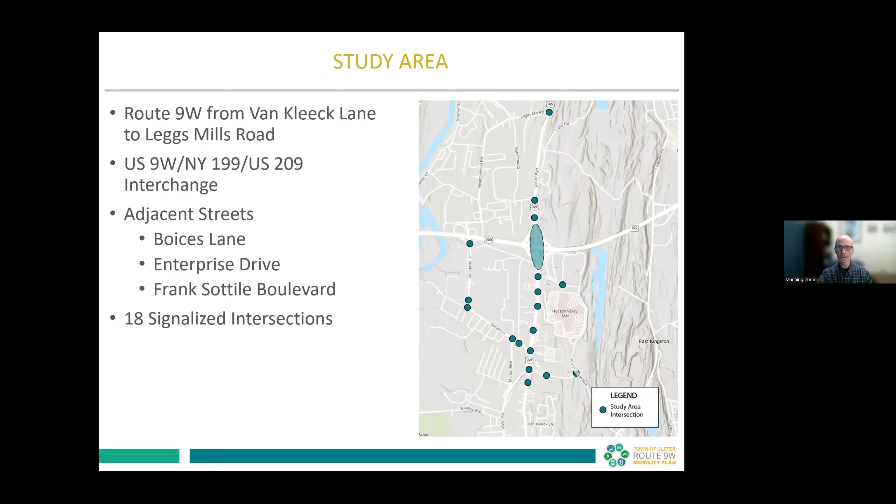The purpose we've talked about in the opening remarks is to look at safety and connectivity for all users in this important corridor, and to consider future travel needs, as Brian mentioned, 20 years into the future. We've been at this for a couple of years already, and we had a meeting very similar to this last summer where we got your input, and now we're back to share our recommendations with you and get your feedback on that as well. What we heard from you last summer when we asked, what are your priorities for the Route 9W area? Improved safety came out as the most important element, followed by improved bicycle and pedestrian mobility and accommodations, and connectivity or access management. You can see some of the other things that weren't quite as highly rated

from public input. We also asked what were your concerns with Route 9W, and again, pedestrian connectivity concerns rose to the top, aggressive driving, and the needs of bicyclists as the top three. In the middle there, you can see congestion. So although there's a perception that there is a fair amount of congestion out here, it's not the highest concern of the people that use Route 9W in the surrounding area.

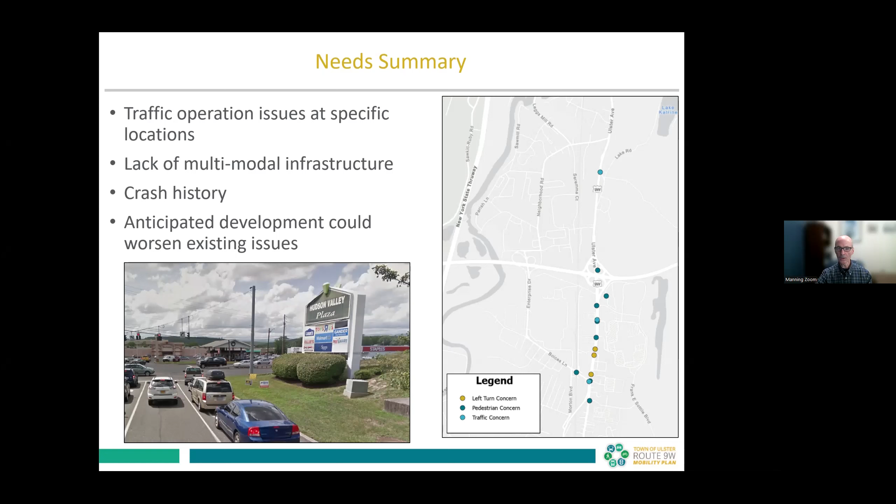So coming out of the existing conditions work, we identified a number of needs. None of this should be a surprise to any of you, but traffic operations at specific locations, the lack of multimodal infrastructure, meaning safe pedestrian crossings and lack of bicycle accommodations. There are crashes in certain areas, particularly in the south end of the corridor near Ulster Avenue, and the anticipated worsening of conditions as development at I-Park 87 and other redevelopment happens in the area.

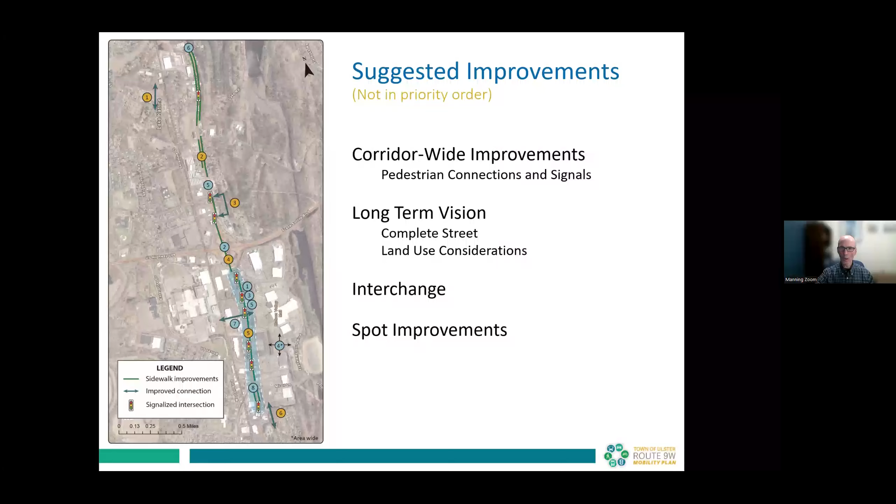So as a result of all of that work, we did develop the draft recommendations that we'll share with you now. And basically, we've categorized it with these 4 categories. Corridor-wide improvements. We think there's a real opportunity here to do some of the obvious things to improve pedestrian accommodations. And then a long-term vision that we'll walk you through. Some of that work could be more short or medium term, as Brian had mentioned in his opening remarks. So we'll walk you through these draft recommendations. So this is really the meat of it.

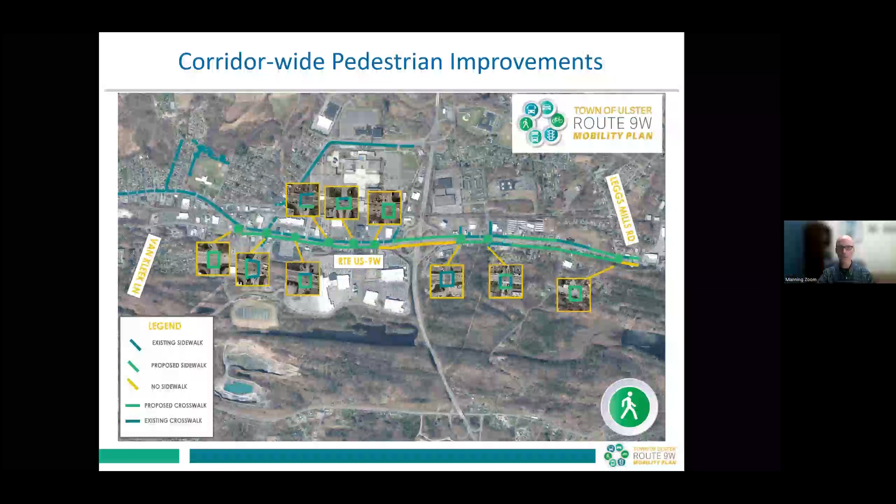At the intersections themselves, the study recommends completing the box or adding safe crossings at all of the signalized intersections in the corridor, where the majority of the signals do not have simple pedestrian crossings today. So really a straightforward priority is to get some pedestrian improvements in place in this corridor.

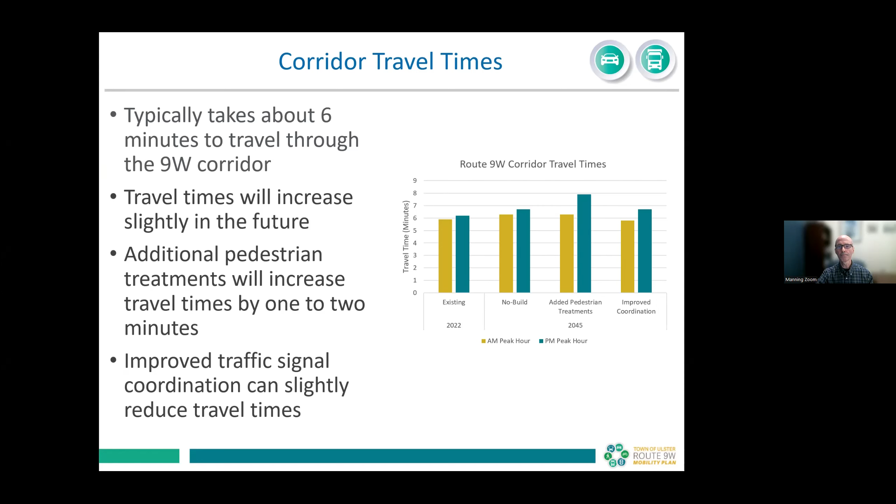We also looked at the trade-offs of what that would mean, and without spending a lot of time on this, the bottom line is that as more time is given to pedestrians to be able to cross the street safely, some of that time is taken away from traffic. With concerns already about a little bit of traffic congestion out here, it's good to know that we can add pedestrian accommodations, modify the signals, optimize them to coordinate them, and overall travel times will be substantially similar to what they are today for motorists. So it's a win-win. Motorists will realize similar conditions, and pedestrians will benefit by all the improved accommodations.

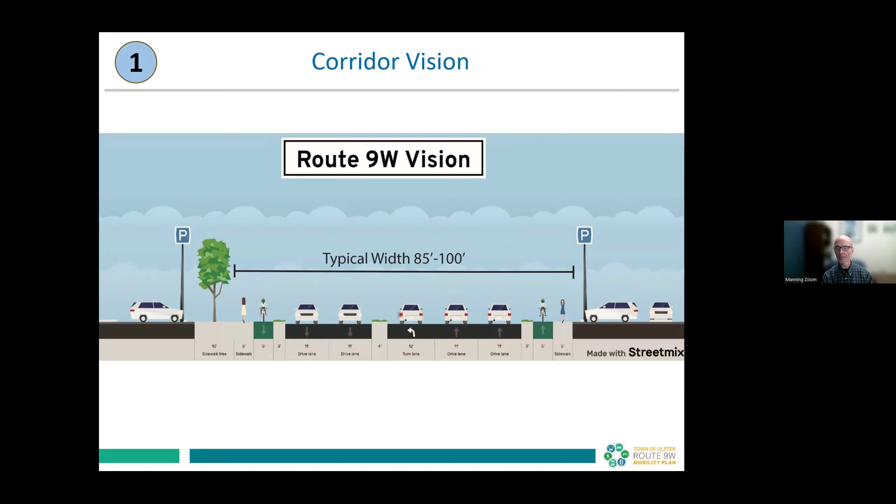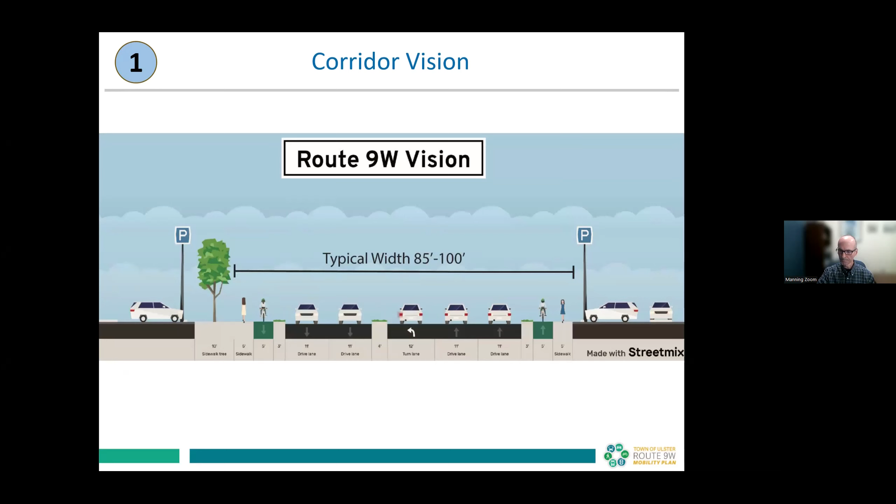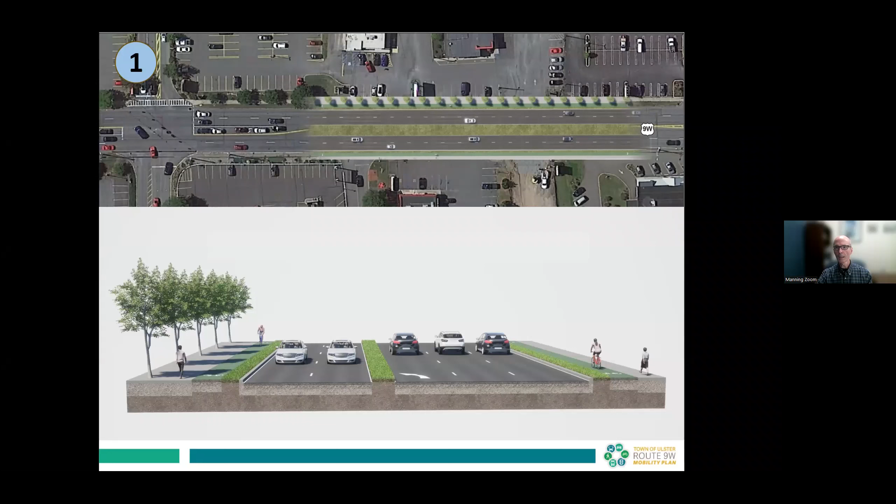From a long-term vision standpoint, the street today, Route 9W, is roughly 80 feet wide, give or take, from back of sidewalk on the west to edge of curb on the east. And the idea long-term is to incorporate more features for non-motorized users, widen the corridor by roughly 20 feet to accommodate the sidewalk that I mentioned on both sides, and bicycle accommodations raised and separated from traffic. That could look something like the schematics you see here, which would also improve safety and include a raised median in sections where it's considered practical and feasible.

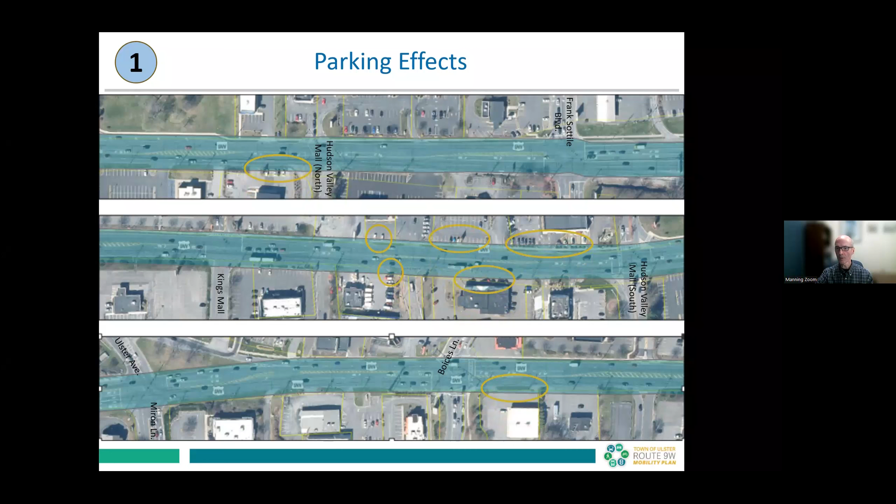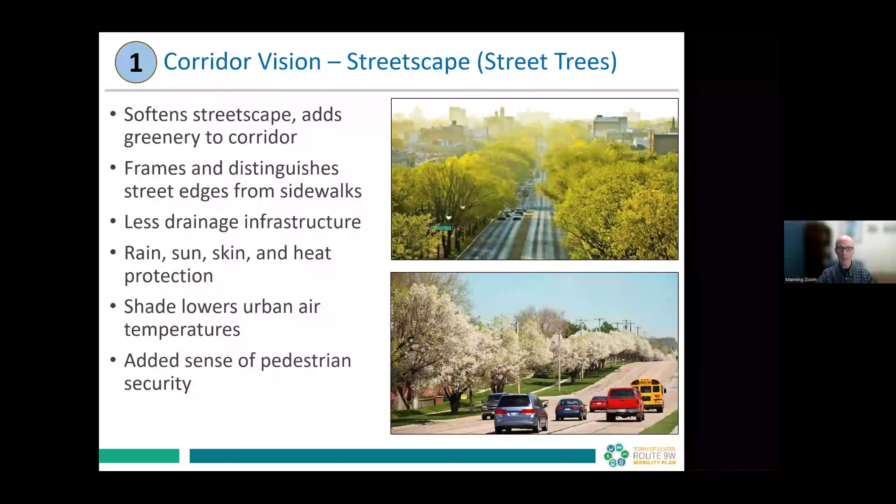There are a lot of other benefits to complete streets and incorporating street trees to protect people walking from the heat and sun, and make the street more attractive and give pedestrians a sense of security. So that all kind of illustrated a long-term vision for the corridor itself.

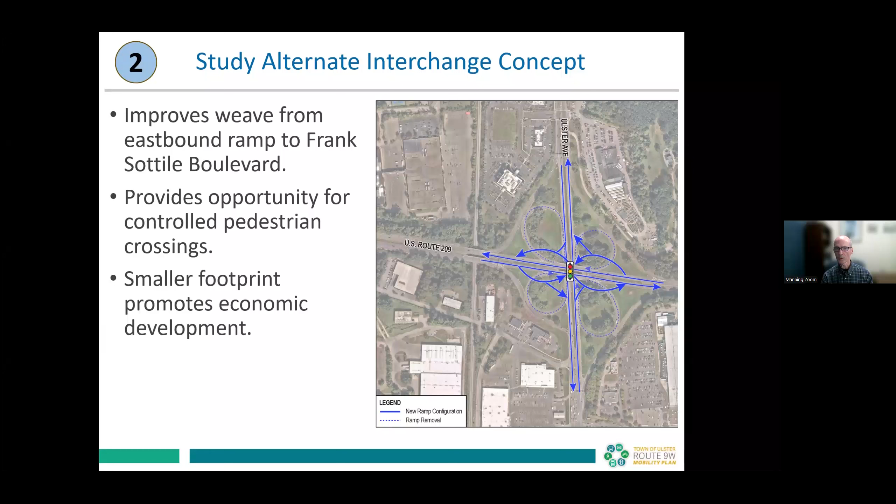The study also looked at concepts for the interchange. The idea there is when the bridges that currently carry Route 209 over 9W reach their useful life, that would be the time to evaluate different configurations of the interchange. One concept is shown here. It's a single point urban interchange. It would provide improved pedestrian accommodations so you could cross the ramps at a signal. It would free up some space for economic development. It would moderate speeds through the area where right now there's a big speed differential between the interchange and the signals on either side.

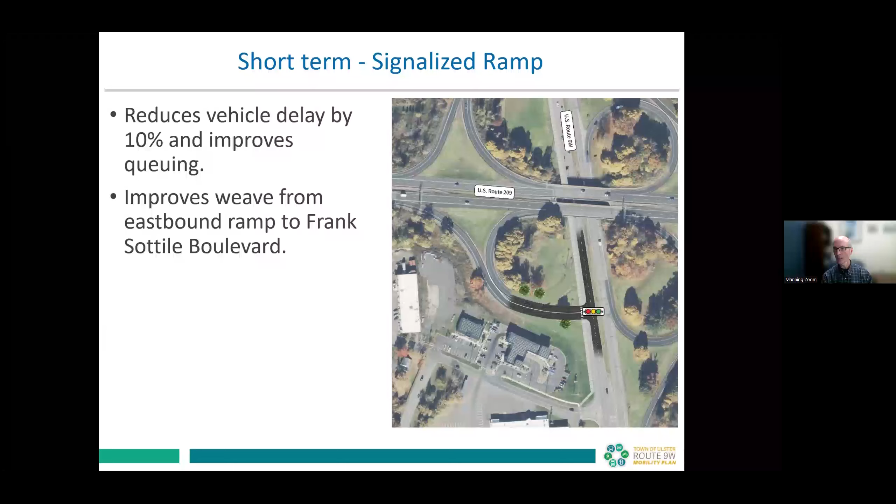In the short term, the recommendation at the interchange is to signalize the eastbound off-ramp shown conceptually here. This is an area where there are longer delays for motorists waiting on the ramp, and there's also a weaving issue south of the ramp and a crash history, and the signal would address both of those issues.

The vision also includes improved transit accommodations, again, for people that don't have access to a motor vehicle and are more long distance travelers, so they could get access to all the services in Ulster without having to drive a car.

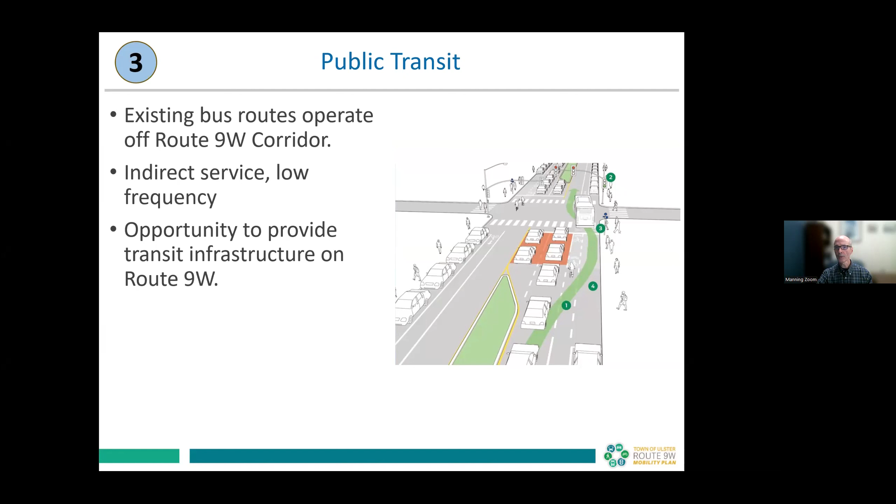Incorporating land use best practices long-term is also a recommendation of the plan. The Ulster County Transportation Council has issued their community design manual, which articulates a number of best management practices, including mixed use and site design features and things that promote walkability, again, as a way to de-emphasize reliance on the motor vehicle.

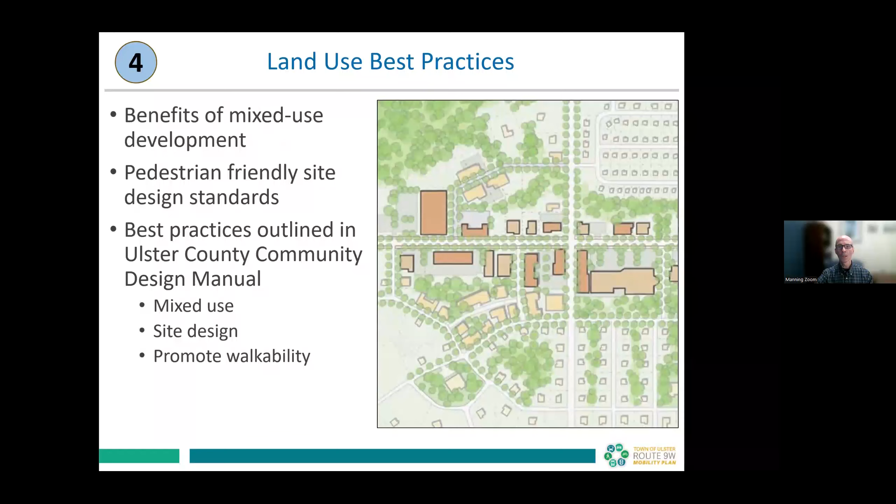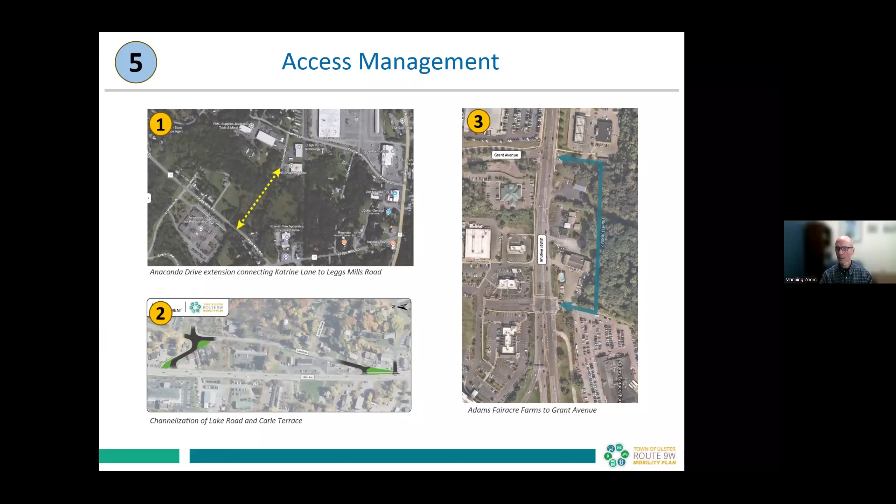Access management is also part of the long-term vision here, and some of these might be able to be implemented a little sooner. Three concepts here: beginning in the upper left, is to extend Anaconda Drive to Leggs Mills Road. In the lower left, channelizing some intersections in the vicinity of Lake Road. And on the right, extending a connector road from Adams Fairacre Farms to Grant Avenue behind some of the businesses there, including Jolly Cow.

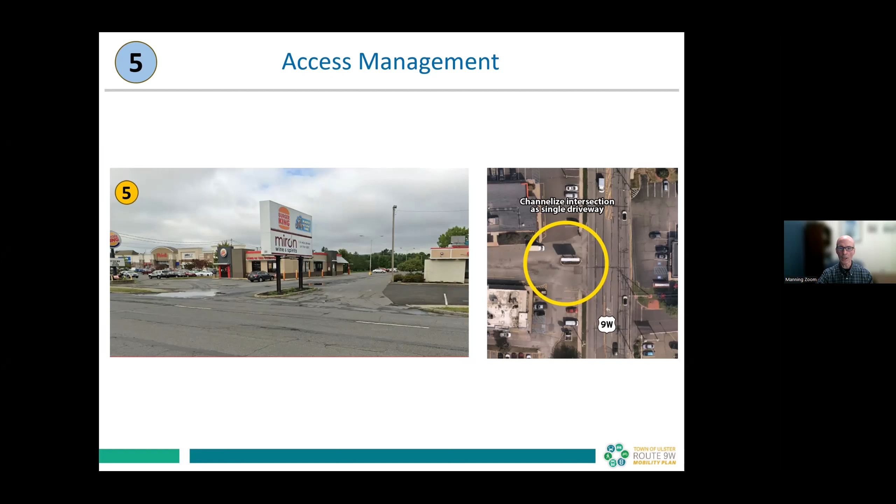Another access management concept is to modify the driveway in the area of the Burger King. You can see on the left, there are two-way driveways on either side of this large sign. And the idea would be to replace that with one two-way driveway, reducing the pedestrian crossing distance and reducing conflicts and addressing safety issues with multiple conflict points there.

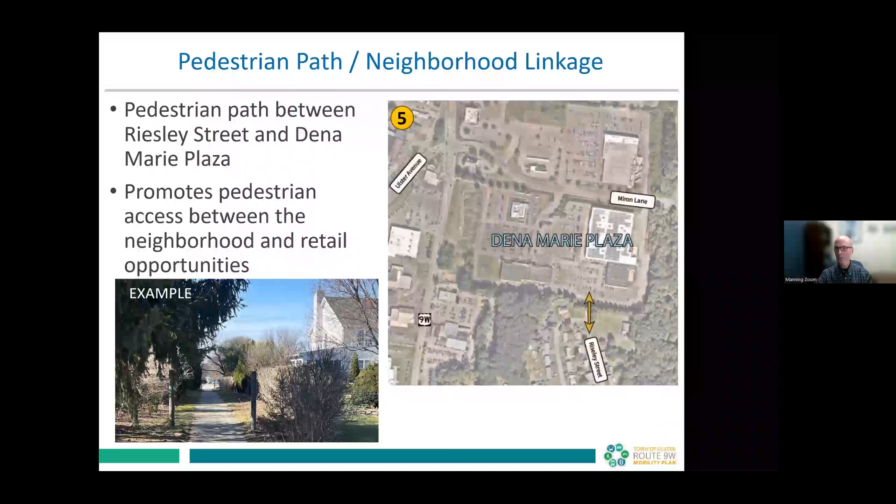Related to access management is the idea of a pedestrian connection between the Riesley Street neighborhood and the Dena Marie Plaza. And you can imagine a nice connection like this would enable people in that neighborhood to walk back and forth to the plaza without having to jump in their car and drive along Route 9W.

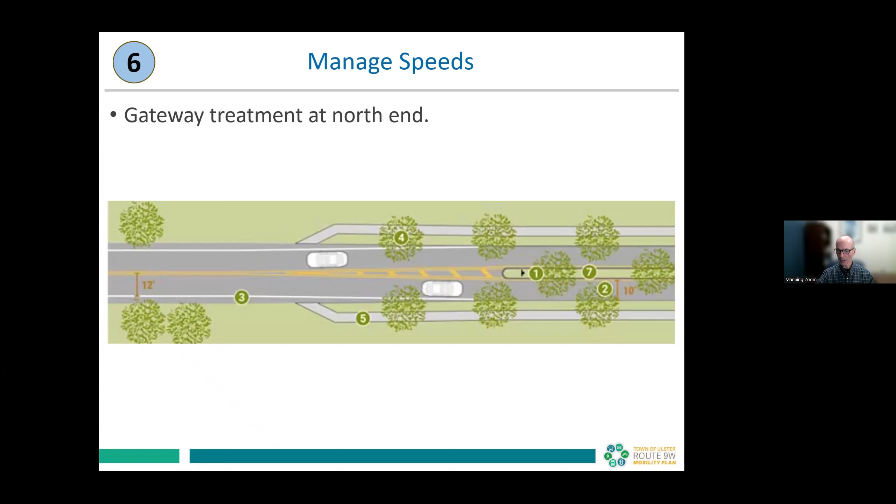Another part of the long-term vision here is to pursue a gateway on the north end of the town, north of Leggs Mills Road. We heard concerns about speed of traffic entering the town from the north. Features like you see here, a raised median, trees, beginning the sidewalk network at a logical point north of Leggs Mills Road. All of these things will tell the driver the change in character of the road and to modify their behavior so they can enter the town at a better speed and really make it safer for all users.

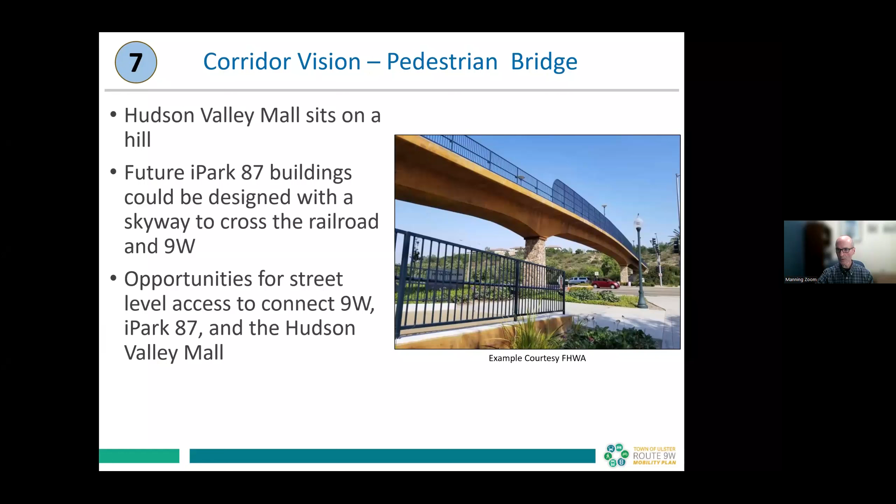Another part of the long-term vision is to consider a raised pedestrian bridge between the Hudson Valley Mall and iPark 87, extending over Route 9W and the CSX Railroad tracks. And you can just imagine how a connection like this somewhere in the middle of the corridor would really benefit those new residents of the iPark 87 area, where they wouldn't need to walk out on Boices Lane nor jump in their car to get to some of the services along Route 9W.

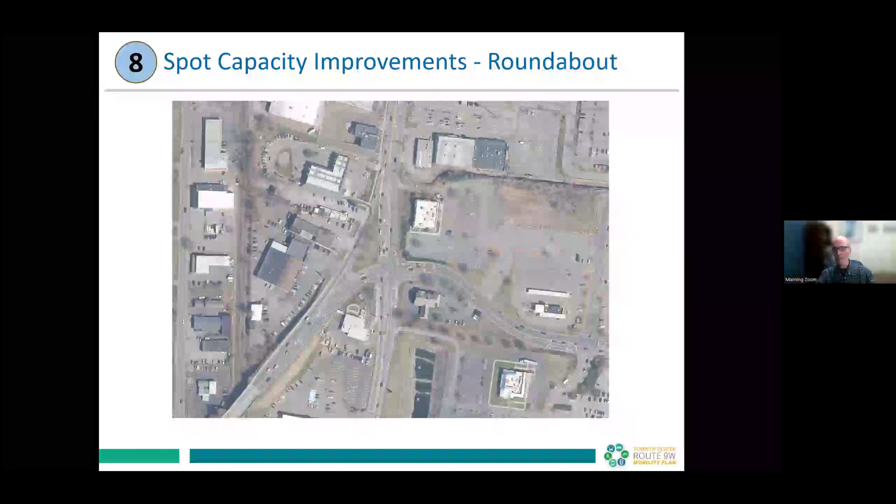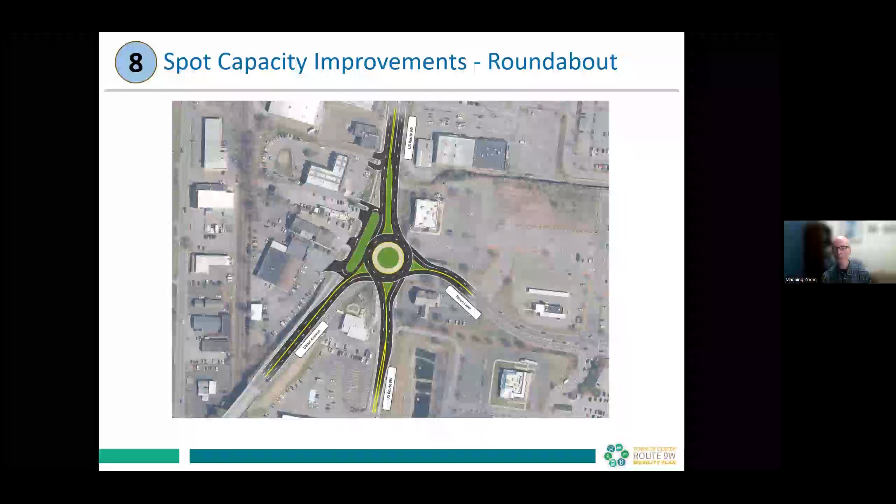An additional concept or recommendation in the plan we'd like your feedback on is the idea of a roundabout at Ulster Avenue. And you can see the existing configuration here. It is an area where there is a higher crash experience and probably the most congested location in the corridor. And this is what a roundabout would look like conceptually at that location. That little slip road, frontage road, would be converted one-way northbound, actually providing better access in and out of all those businesses than currently exists. A motorist could use the roundabout to change direction.

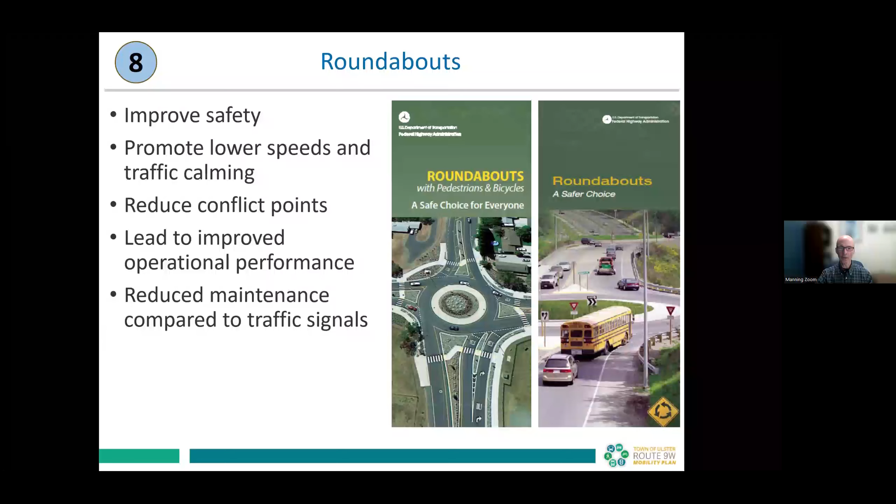If you're not all that aware of the benefits of roundabouts, or if you have a strong opinion about them, you should know that they are a proven safety countermeasure by FHWA. They do reduce crashes. They enable lower speeds. They calm traffic. They lead to improved operational performance, meaning less delay. And they are a very good form of traffic control, and they're easier and less costly to maintain than traffic signals.

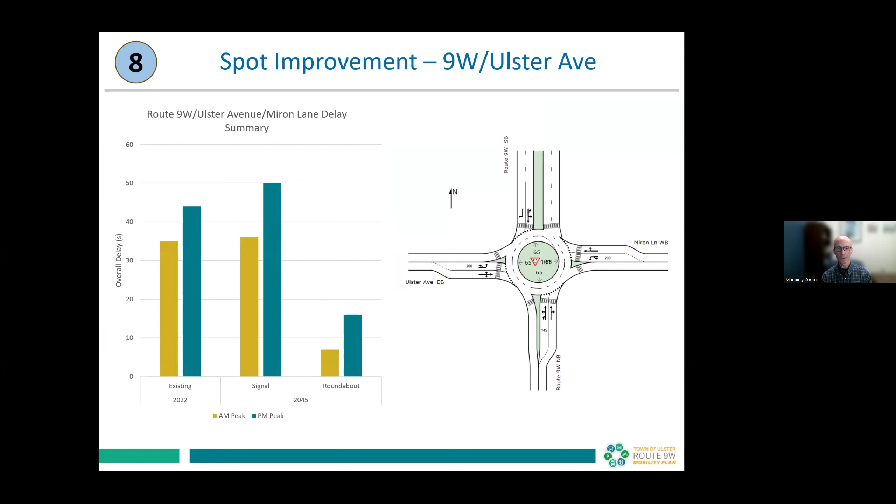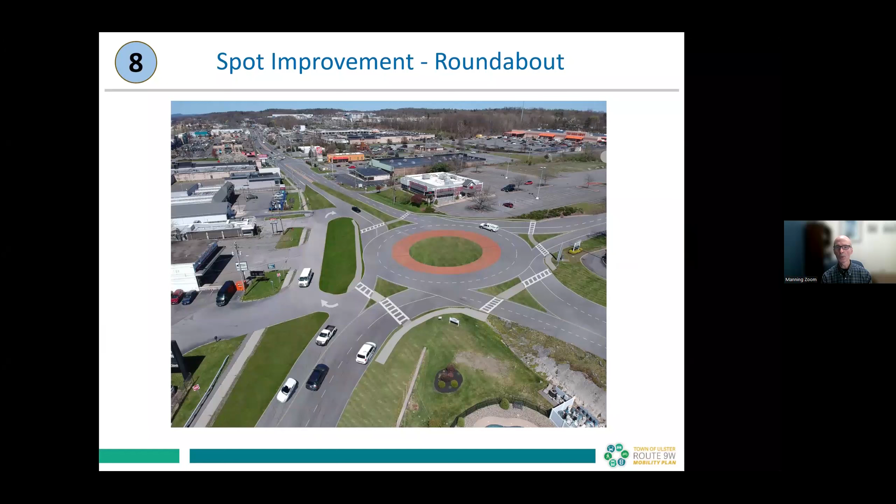We've analyzed the effects of a possible roundabout here, and you can see by the bar charts that a roundabout would significantly reduce delays at Ulster Avenue, represented by the dark blue, bluish green bars there, from nearly a minute of delay to 15 seconds of delay. And this is what it could look like in its final form, a general rendering.

So with that, we'd like your feedback on the concepts that you've seen here in the draft recommendations in the Route 9W mobility plan. Complete the survey. As you heard in some of the opening remarks, it's really important that you let us know what you think about these ideas.